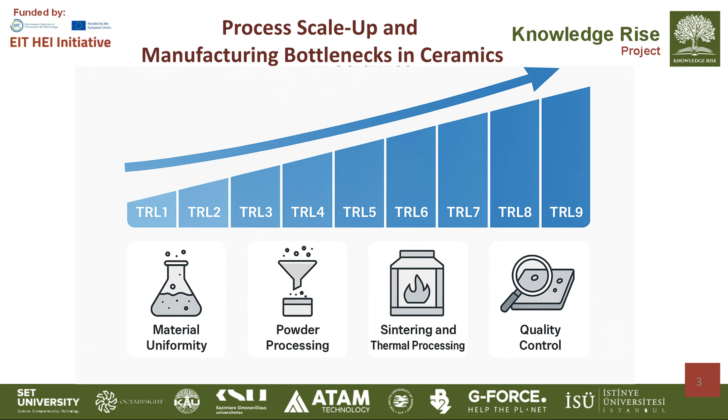In the first lecture, we discussed some examples of advanced ceramics. Now I will discuss in this lecture how to develop smart materials, especially smart materials with crack healing effect in ceramics.

Ceramics are among the most versatile materials in advanced engineering, prized for their high hardness, corrosion resistance, and thermal stability. However, their inherent brittleness and poor fracture toughness have long limited their structural application. In recent decades, the development of smart materials, especially ceramics capable of self-healing, has revolutionized this field. These materials can autonomously repair microcracks or damage caused by mechanical or thermal stress, extending their service life and reliability. The crack self-healing effect in ceramics represents a major advance in material science, merging structural integrity with functional intelligence.

Smart materials are systems that respond adaptively to external stimuli, such as heat, stress, or chemical changes. We discussed it in the first lecture. In ceramics, self-healing behavior enables the material to recover mechanical properties after damage, much like biological healing in living organisms, as we discussed for concretes in the first lecture. This phenomenon not only improves durability but also reduces maintenance cost and enhances safety in applications such as for ceramics or concretes, especially for advanced ceramics used for aerospace components, turbine engines and nuclear reactors, where thermal healing is used.

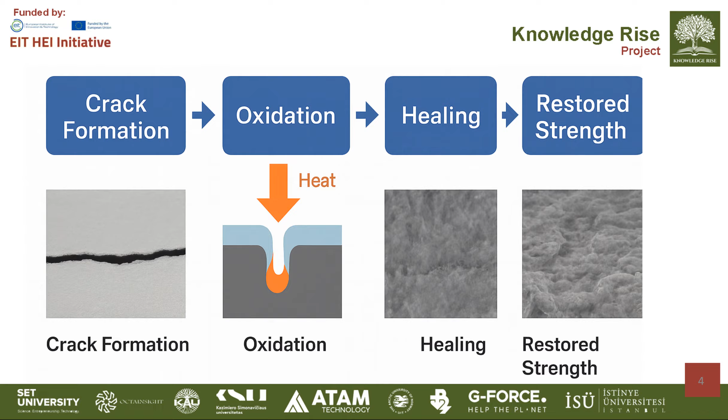The first step is to select the materials for these systems. It means the main material, the basic material, will be silicon nitride, but we have to select the healing agent for this composition.

The incorporation of healing particles, usually metallic or non-oxide forming agents within a ceramic matrix, provides a mechanism for filling and sealing cracks through oxidation-induced volume expansion. This self-healing phenomenon enhances structural reliability, prolongs components life, and reduces maintenance costs in demanding applications. The crucial factor governing the efficiency of self-healing in ceramic composites is the relative volume expansion upon oxidation.

As you can see on this slide, different materials from titanium to some nitrides and carbides could be used as self-healing agents. But not all of them could be selected, because the relative volume expansion of these materials is too low.

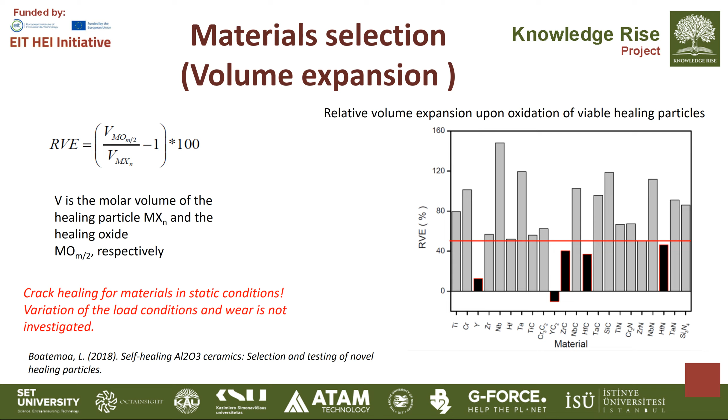But you may want to ask why we need to use this material. The proposed application for this material of silicon nitride with zirconium nitride is ceramic seals and sliding or rolling bearings which work in extreme conditions, for example high temperatures or seawater.

Replacement of metal components like balls and rolls in bearings with ceramics helps us make bearings much lighter. It works better, and the self-healing effect helps us enhance durability, lightweight properties, and the possibility to work in extreme conditions at high temperatures.

Silicon nitride was selected because in composition with zirconium nitride, it's the healing agent - zirconium nitride starts to oxidize at high temperatures around 500 centigrade. It helps us to operate this bearing at high temperatures.

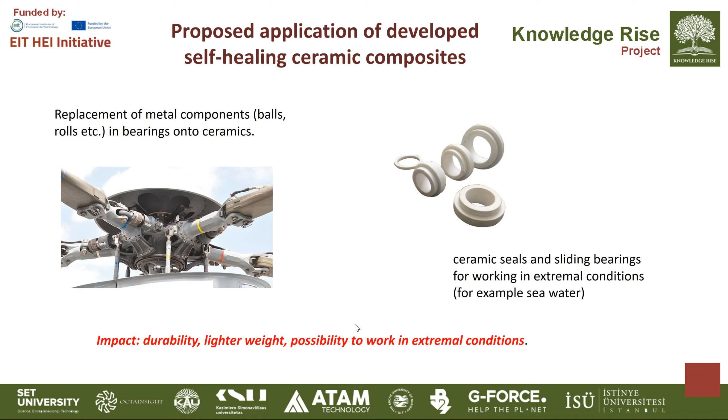Producing these materials includes a lot of steps, and the first stage for the material is thermal synthesis of composite powders with silicon nitride and zirconium nitride. The objective of this stage is to obtain high quality composite powder mixtures as a raw material for self-healing ceramics.

On this stage, thermal synthesis of silicon nitride with zirconium nitride composite powder has to be carried out without mechanical milling to exclude additional contamination of ceramic by metal particles or other materials, ensuring chemical homogeneity and controlled particle morphology. The synthesis parameters - temperature, atmosphere, and holding time - have to be optimized to achieve the desired phase composition. Experimental pilot batches have to be produced to define technological regimes for powder preparation.

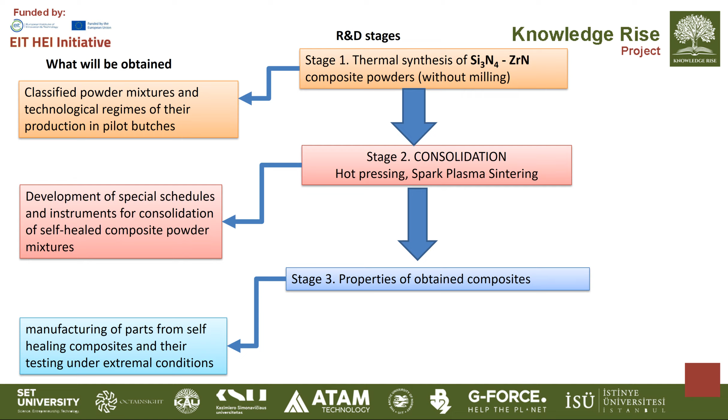And continue - the first stage, thermal synthesis of high melting point composite nitride powders without milling. The development of high-performance materials from nitrides, particularly advanced ceramic composites based on nitrides, is one of the most promising directions in modern material science. Nitride ceramics such as silicon nitride, titanium nitride, zirconium nitride are known for their high hardness, excellent wear resistance, thermal stability, and chemical inertness. These properties make them ideal for aerospace, energy, and mechanical applications.

Traditional processing of composite powder often involves mechanical milling to ensure homogeneity. However, mechanical treatment can introduce contamination, alter stoichiometry, and cause undesirable oxidation. Therefore, thermal synthesis without milling has emerged as a clean and efficient alternative for producing high-performance composite materials from nitride powders with controlled microstructure and high purity.

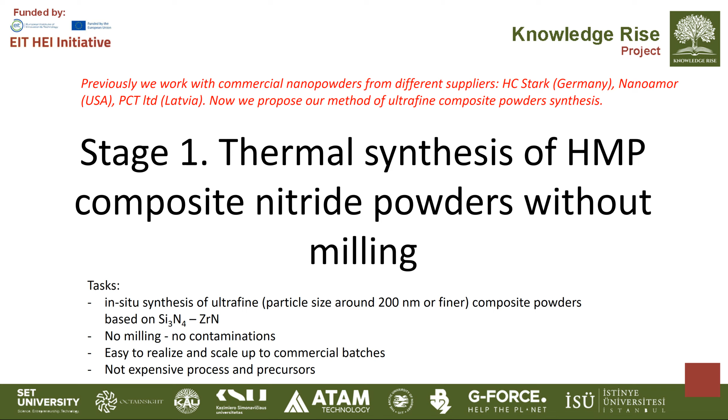The thermal synthesis of silicon nitride with zirconium nitride composite powder without milling represents an advanced contamination-free route for production of high-performance ceramic materials. By relying solely on controlled high-temperature reactions, this method ensures chemical purity, uniform microstructure, and reproducible composition, all essential for the development of self-healing, self-strengthening ceramic composites. Through further optimization, scaling this approach can support the sustainable production of advanced nitrides for aerospace, energy, and industrial applications, marking an important step towards the next generation of smart, durable ceramic materials.

As we know, the silicon nitride with zirconium nitride composite system combines the excellent mechanical and thermal properties of silicon nitride with the toughness and oxidation-driven self-healing potential of the healing agent, zirconium nitride. The synthesis of this composite powder aims to produce a uniform, high purity, fine-grained material for advanced ceramic applications such as aerospace, bearings, cutting tools, and self-healing components. The powders are typically produced through thermal nitriding,

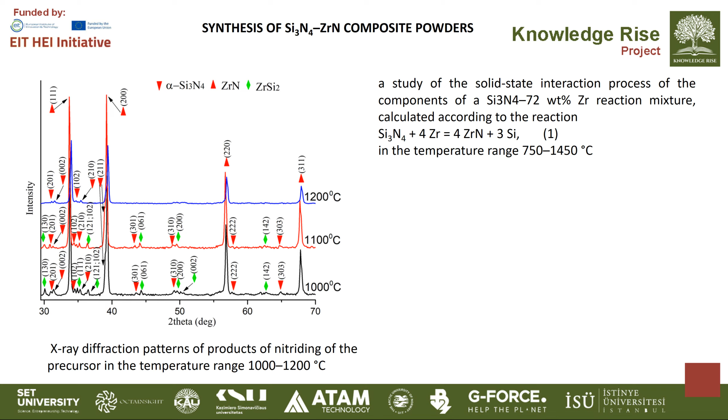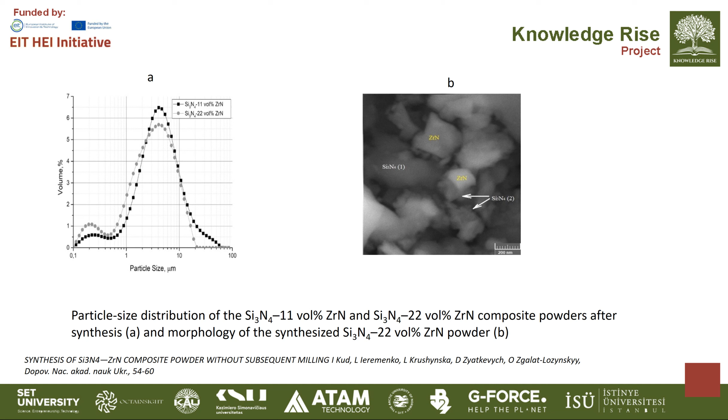The next step is consolidation of self-healed composites. The main idea of this stage is that consolidation ensures that densification, homogeneity, and interfacial bonding of the composite constituents are achieved, which are prerequisites for both mechanical strength and healing efficiency.

Consolidation is a stage in material processing where powder precursors are compacted and sintered to form a dense, mechanically stable solid body. In self-healing systems, especially those based on ceramics such as silicon nitride with zirconium nitride, the structure obtained after consolidation defines how healing phases are distributed and will be activated when a crack forms. There are a lot of consolidation techniques, but the most advanced technique, which helps us densify material faster and at lower temperature while preserving the fine structure, is spark plasma sintering.

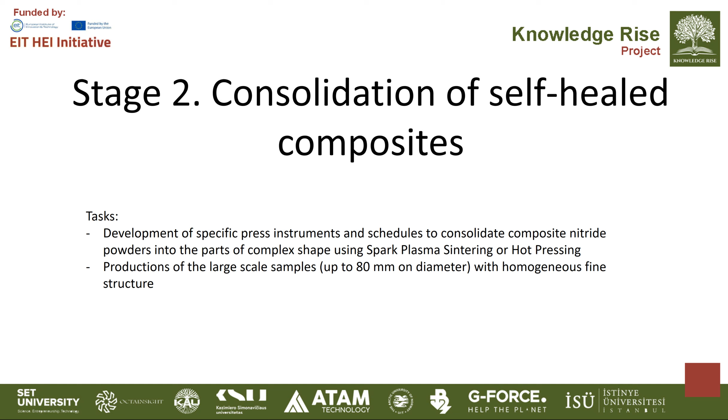We selected this technique for consolidation of these composites. But the next step is to develop a special schedule for this ceramic. In our previous work with commercially available powders, we developed special non-linear spark plasma sintering schedules for different nanocomposites.

These micrographs illustrate the microstructure of titanium nitride with silicon nitride, titanium carbonitride nanopowders, which were consolidated using spark plasma sintering technique with non-linear schedules for this material.

The nonlinear spark plasma sintering approach was proposed in our previous work. It's a novel modification of traditional spark plasma sintering where we try to optimize densification kinetics to achieve higher density while preserving grain size.

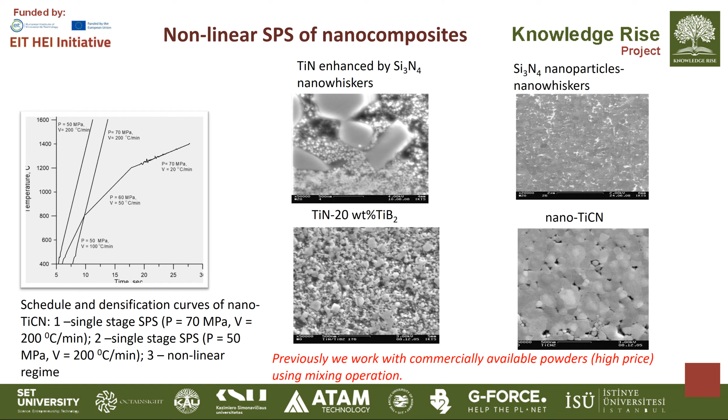We apply this technique for consolidation of the composition of in situ synthesized silicon nitride with zirconium nitride. We added special oxides to activate the densification process.

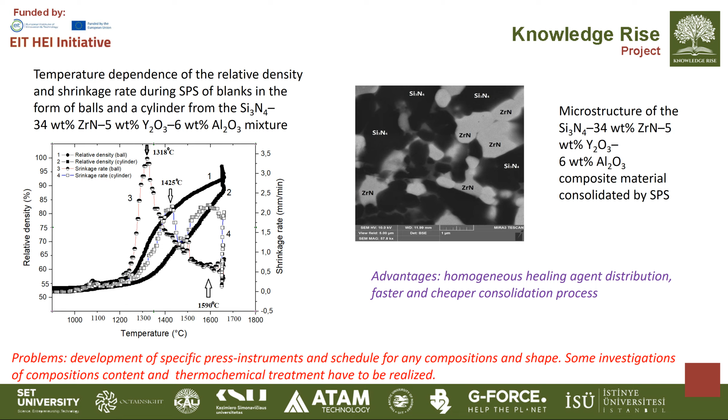The next step is the development of special tools. As I said on a previous slide, it's a problem. We developed the special press tool from graphite to obtain the ceramic balls.

Here you can see the SPS consolidated samples in a near ball shape, and these consolidated samples could be polished precisely into ceramic balls with a specific diameter around 13 millimeters. These balls have a high relative density, around 97% of theoretical, with high Vickers hardness and fracture toughness.

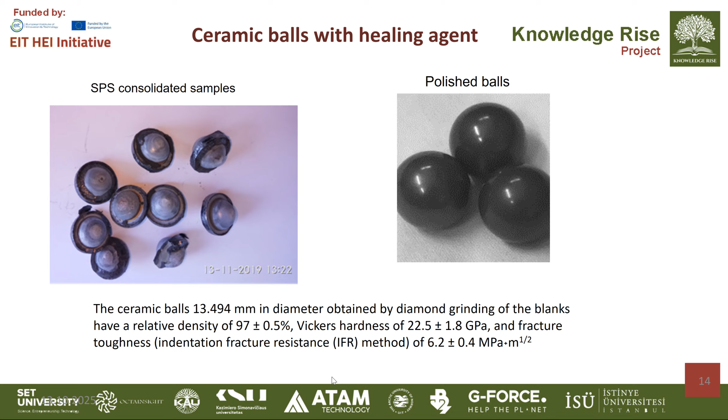The next stage is materials testing. The evaluation of self-healing ceramic composites requires a comprehensive understanding of mechanical and tribological behavior before and after the healing process. This test confirms whether the material can efficiently restore its properties after damage and maintain performance in harsh environments, such as high load in balls or energetic or mechanical systems.

The first test we proceed with is a high temperature bending test to determine the residual strength and healing efficiency of ceramic after exposure at elevated temperature. When cracks form, oxidation of the embedded healing agent, zirconium, oxidizes and seals the crack to restore load bearing capacity. Self-healed silicon nitride with zirconium nitride composites can recover up to 80 or 90% of original strength after thermal treatment.

The next test is hardness. Vickers hardness or nano-indentation hardness testing reveals surface integrity and densification quality of the self-heal zone. After healing, the formation of oxide or glassy sealing phase often leads to increased local hardness, indicating successful bonding and crack closure.

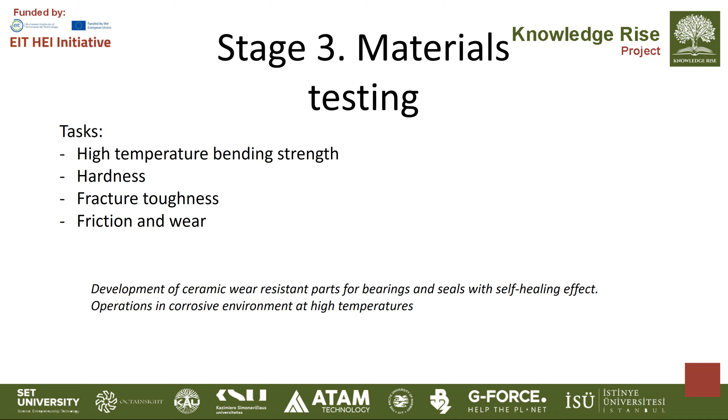As we can use this material as a ball bearing, we have to make tribological tests, but for tribological tests the main problem is to select the suitable counter body. It could be some hardened steel, alumina, tungsten carbide, etc. This ensures controlled testing and helps replicate real service conditions.

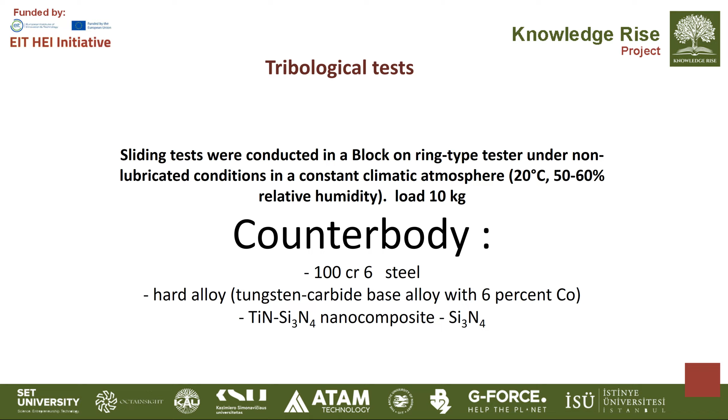We test our material with steel and hard alloy, and with titanium nitride and silicon nitride nanocomposites, to select the most suitable counterbody material to produce a fully ceramic bearing or a hybrid bearing.

In conventional bearings, metal components such as steel balls and races, commonly made from bearing steel, operate under high contact pressure and frictional loads. During prolonged use, these parts are exposed to mechanical wear, oxidation, and micro-welding, leading to surface damage, increased friction, and eventually failure.

To overcome these challenges, the concept of replacing traditional metallic components with self-healing ceramic composites has been proposed. Materials like silicon nitride with additives of zirconium nitride or titanium nitride nanocomposites exhibit excellent hardness, oxidation resistance, and wear behavior.

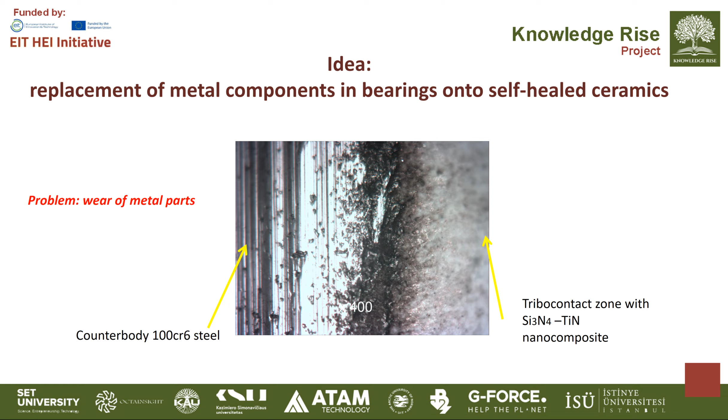We investigate different materials, not only bearing steel, but also ceramics counterbody and tungsten carbide based counterbody. We investigate the surface of different counterbodies after tribological test in dry wear.

The figure presents a comparative study of surface condition before and after tribological tests of hard alloy and silicon nitride based nanocomposites under dry sliding condition. The objective is to analyze wear mechanism, surface morphology, and potential of ceramic composite for bearing solutions.

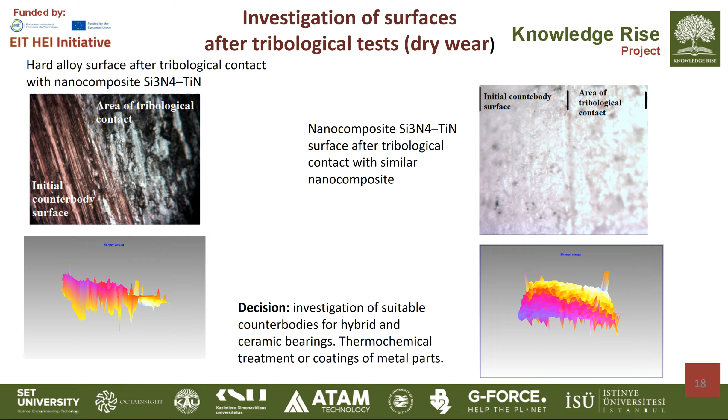But we have to calculate the cost for these materials before constructing the bearing, as I said, as the next step. The next step will be construction of ball bearing elements.

To overcome this drawback, researchers have developed self-healing ceramics. We developed self-healing ceramic composites that are capable of autonomously repairing damage during service through controlled oxidation reactions, as I said earlier. Among these materials, silicon nitride with zirconium nitride composites stand out for their excellent combination of mechanical properties.

Here you can see the mechanism of self-healing, the effect of self-healing for the ceramic based on silicon nitride. Here the defect has a 50 micrometer width, and when we expose it at high temperatures around 500 to 550 degrees, the crack could be healed within 5 hours.

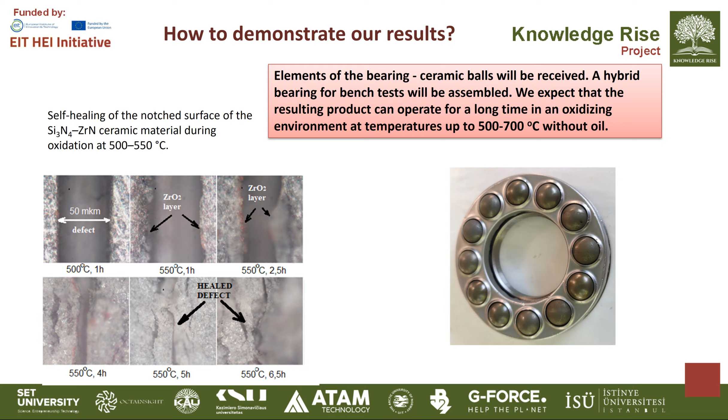The next step is quality control, standardization, and reliability for advanced ceramics. Quality control focuses on ensuring that every step from raw material preparation to final inspection meets stringent performance and safety criteria. Unlike metals or polymers, ceramics don't exhibit plastic deformation before failure. This means that even microscopic flaws such as pores, inclusions, or microcracks can lead to catastrophic fracture under stress.

The key quality control objectives include material purity monitoring of chemical composition and particle size distribution of ceramic powders to ensure consistency, process stability to maintain precise control over forming, sintering, and finishing parameters, and defect detection using advanced inspection techniques to identify structural irregularities before they compromise product integrity. This quality control serves not only to verify product performance but also to prevent costly failures in critical applications such as turbine blades, armor systems, or dental implants.

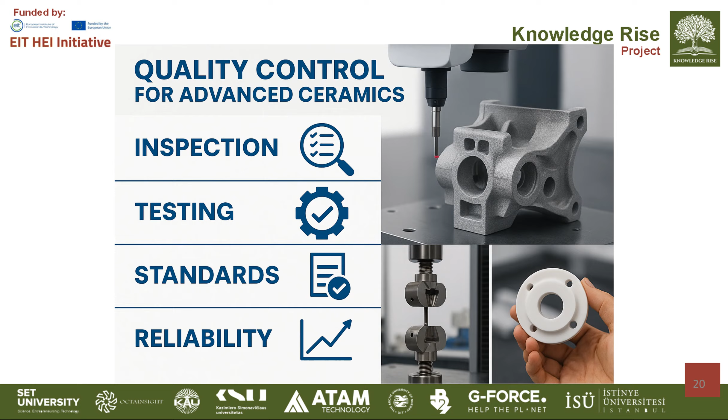The next topic is supply chain, cost, and material availability issues in advanced ceramics. The performance of advanced ceramics depends heavily on the purity and availability of specific raw materials. Elements such as yttrium, zirconium, boron, aluminum, and rare earth oxides are critical for producing these samples of advanced ceramics. However, these materials are sourced from limited geographic regions, creating vulnerabilities—supply chain is quite fragile.

For example, rare earth oxides, vital for electronic and optical ceramics, are predominantly mined in China, which controls a large portion of global supply. Ceramic production is inherently energy demanding due to high temperature processing.

Ceramic production is inherently energy demanding due to high temperature processes such as calcination, sintering, and hot pressing or spark plasma sintering. Typically, sintering temperatures range from 1000 to 2000 degrees, requiring prolonged heating cycles and substantial energy input. In some cases, such as silicon carbide or alumina ceramics, even higher temperatures are needed to achieve full densification and desired microstructural properties. These high energy requirements significantly affect production cost and carbon footprint.

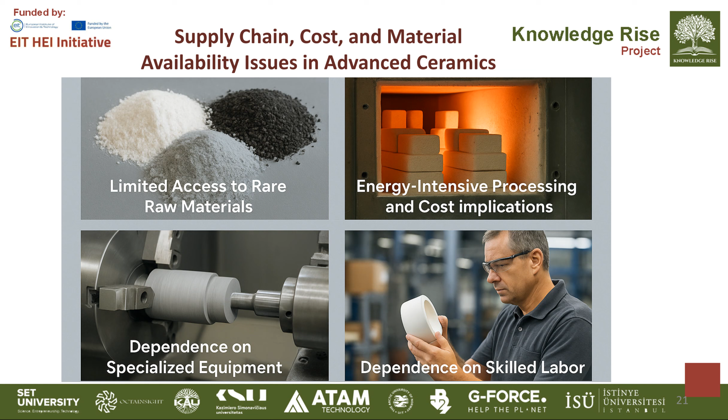The production of ceramics is inherently resource and energy intensive. Processes such as raw materials extraction, powder synthesis, and sintering consume large amounts of energy and contribute to greenhouse gas emissions. The sintering process, where ceramic powders are densified at high temperatures, accounts for a majority of energy use.

Sintering temperatures can reach up to 1800 degrees, for example. Conventional furnaces rely on fossil fuels or electricity generated from non-renewable sources, resulting in significant emissions of carbon dioxide. For instance, the production of alumina or zirconia ceramics can emit up to several kilograms of carbon dioxide per kilogram of material produced.

Ceramic production depends on minerals such as rare earth oxides, silica, etc., which are often mined in environmentally sensitive regions. The extraction and refinement process leads to soil degradation, water pollution, and high waste generation.

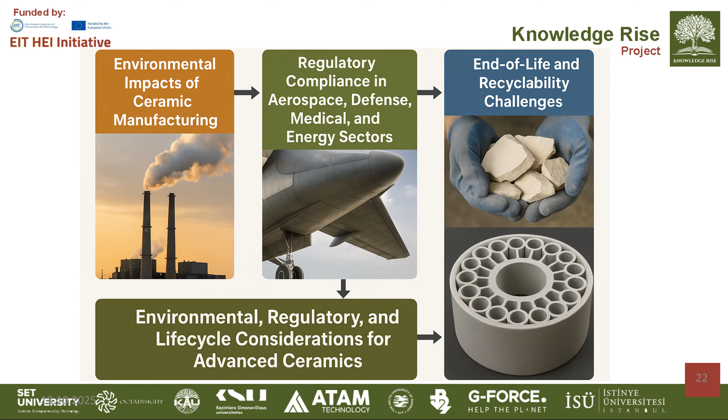Future progress lies in the adoption of green processing technologies, standardized regulations, and circular economy approaches. By addressing this issue holistically, the ceramic industry can achieve sustainability without compromising on innovation and performance.

In the next lecture, we will discuss this route, how to develop green processing technologies at different technology readiness levels. And now the lecture is over.